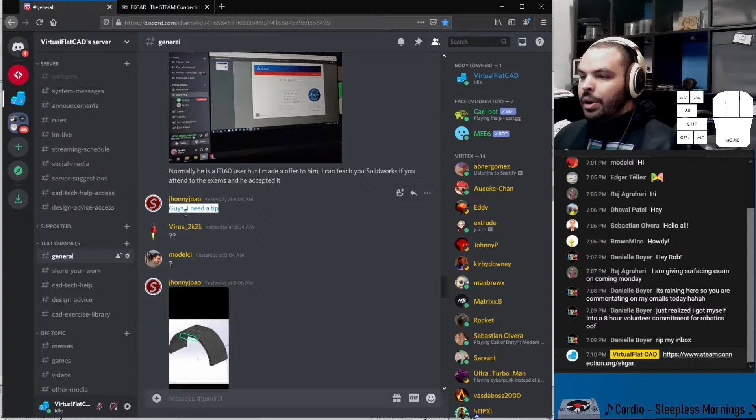But then we got Johnny Joao that comes into the mix here, and this is what our CAD model of the day is going to be about. It says, I need a tip. And looks like he's working on a model here where, I don't even know what this is called. I want to say it's a wheel well, that bump on the inside of a vehicle, like a school bus will have a wheel well. I don't know if that's the right name for it.

I know this down here is a mud flap, but he's trying to model this thing up here, and here he gives a pretty good reference image. So I think we should do this today using surfacing techniques. I think that'll be kind of fun. They try a couple of things. Modelci, here to save the day, suggesting the wrap feature, which for his particular situation, I would have recommended the same thing too. Curve projection, but it didn't accept cutting.

I might model this from scratch. Looks like you got pretty far, man. Yeah, not bad at all. And then he gets, I believe this is in Portuguese, but I bet that translates to rebuild errors. And then here's the thing for today. I'm probably gonna work off of this image here. So let's get this saved out, shall we?

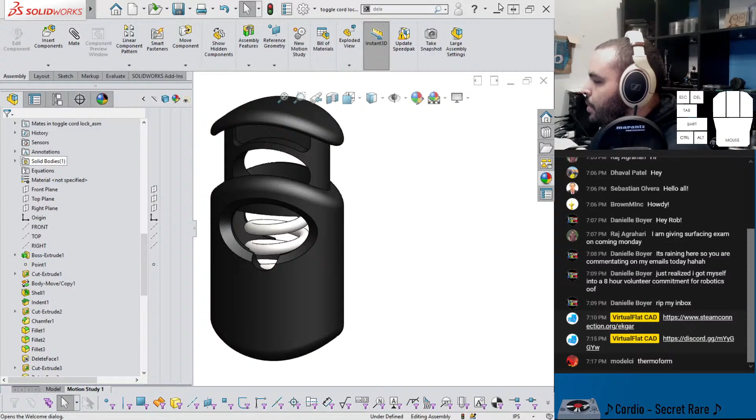So let me get this into Solidworks. Oh, this was yesterday's thing. Still had it open. Didn't restart my computer. Okay, let's get a part. And I'll just paste this in here. And let's get the markup. Let's draw our game plan here.

So what I would expect this to look like, it's kind of this semicircular shape. Like this, right? So it would start with something like this, then model these cutouts. And I might do that by modeling a surface, so that would look like this, sort of. And then maybe use a thickened cut, or something similar to that. That's something we can try, though I see there's like a draft angle there. And then cut this ring, I'll try and shade it in. I really should get a drawing tablet.

So I would sketch that, and then thicken cut into the solid. And the nice thing about that, since it's all solid, I don't really have to worry about trimming surfaces to make them perfect. And then I would rinse and repeat for that. So it's really three main features here. And then there's kind of this lip here. Maybe we can accomplish that with a sweep.

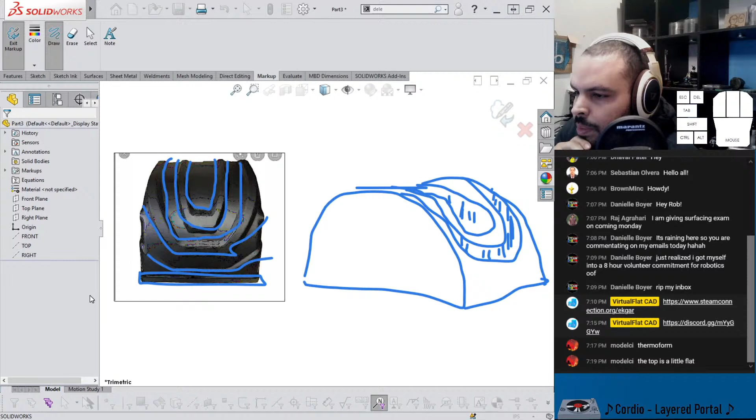Modelci's saying the top is a little flat. Yeah, it's kind of tough to tell. Let me look at the other pictures he posted. And I'm sure you could modify this exact shape into what you want. I assume if the top is flat, instead of being perfectly semicircular, it might go like that and then cut like this maybe. But let's take a look at this. Go back into general.

Man, this is the lowest res picture on the internet. Well, not really. I used the internet throughout like 2006 and even before that, where GeoCities was a thing. So I've seen worse pictures than this, but this picture's a little crunchy. It's a little hard to tell what's going on.

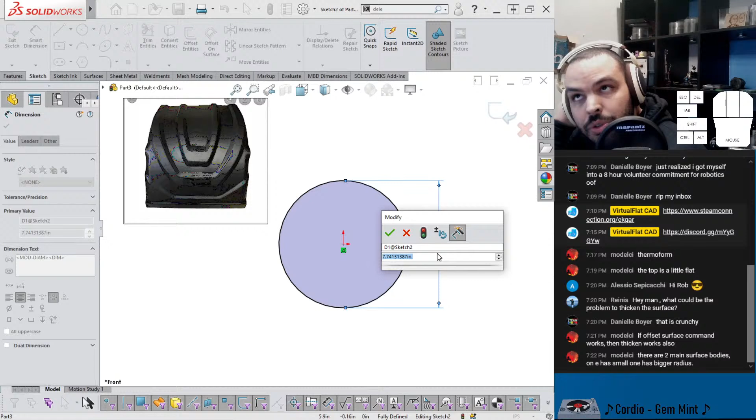And there's many ways to go about this. I'm just gonna show you a way. You may build these two and continue. Yeah, that's right. And then you can probably connect those with a ruled surface or something like that. Depends. Or loft surface or boundary surface. I'm gonna say 42. We'll start with that. That might be too big.

But with that, I'm probably gonna make it like a perfect semicircle. And yeah, we'll just work from there. And I'll resize that picture in a second here. Let's see. Let's go like that, and then let's resize this boy. You know, this is really the best bit of information we have on it.

So to accommodate like a truck tire, maybe this will be like 26 because it's a radius. Around where I drew it, I think is fine. I'll just start with an extrude mid-plane, and to nail the aspect ratio, let's maybe get 24 and turn it to the side. See what that looks like. There. So maybe a bit more, something like that. And then this curving characteristic, we might take care of that with a fillet. We'll see.

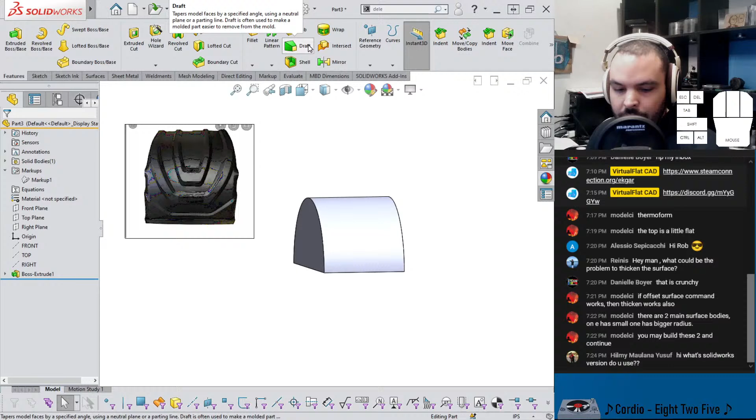Let's see if we can get these fillets in here. These are gonna have to be pretty big, aren't they?

What graphics card do you use? I am actually running an NVIDIA GeForce. It's a gaming card. Yeah, if you're an independent SolidWorks modeler, or you're a student or something like that, I don't think it's critically important that you need a workstation card. Those are very expensive. But actually, Modelci in the chat is very knowledgeable with setting up a computer with SolidWorks. So maybe if you ask him very nicely, he can help you if you're looking to set up a computer. He's active on the Discord.

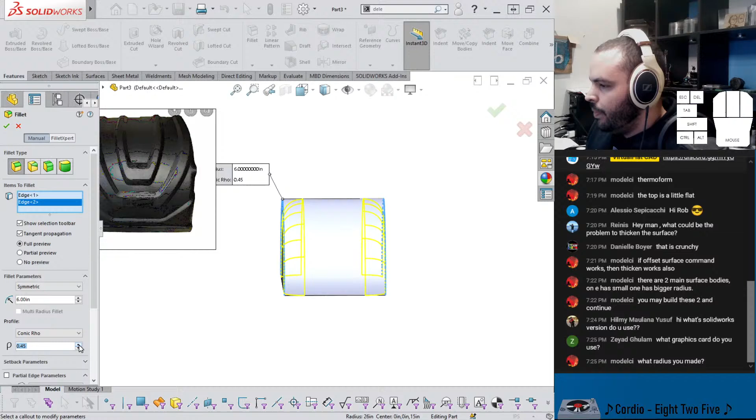What radius did you make? Overall, 26 inches, but I'm trying to see if we can maybe use a unique kind of profile. No, it's too sharp. Maybe use a conic fillet. Something like that. Another mark against this picture is that it's taken with a real camera, so we have to deal with perspective foreshortening. So what I'm going to end up with here is not going to be one for one this exact model. I'm just trying to show you some overall techniques.

But it's 650 millimeters in metric. Modelci coming through for the people in the rest of the civilized world. Yeah, I have to apologize. I am based in the United States of America, so I'm very familiar with the imperial system. Though I do use metric. It's not that I don't like metric. It's just, I grew up with it, so it's just more intuitive for me.

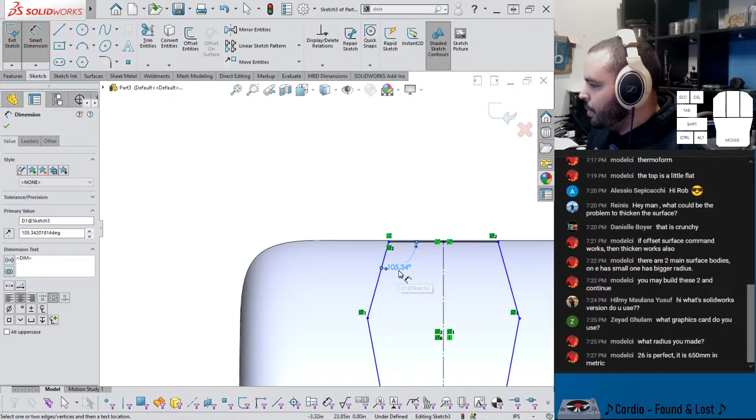Oh man, I don't really know what's going on there. I'll probably put this angle very slight. Shoot. Well, I defined it like a doofus, but just coming a little bit out, because I do perceive it to be doing that. Okay, maybe do that. Kind of defining this shape. So we'll see what we get with just some lines here, because it is fun to break out the spline sketching, but it can also be kind of a pain to work with, and you might get a good result without it. So that's just going to be a little bit less than what's up on top, so I put 6 there.

And then this, maybe let's say 7. And that seems kind of proportionate. So just taking advantage, just drawing the profile that I can perceive as seen from the side here.

Okay, so how do you get this onto this surface? And for this, there are many ways to do that. There is, of course, your project curve. You can project your curve on a surface here. You can use your split line, which I think is a pretty cool thing to do to a surface, because then you can feed it to other surfacing tools. Splitting up faces can give you more control, and that's what I'm thinking of right now.

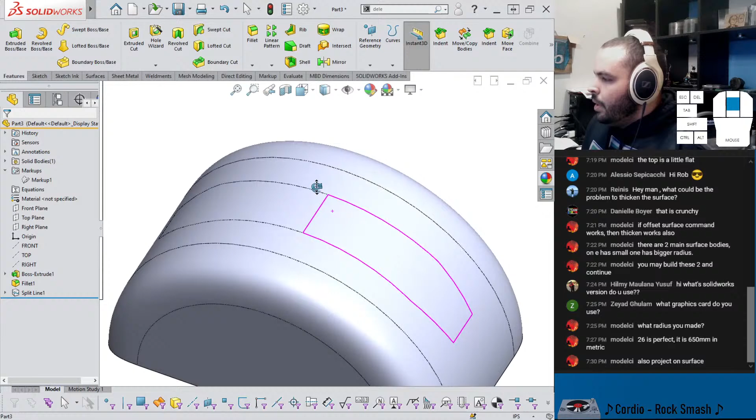You can extrude this as a surface and trim some more surfaces. So yeah, let's try this. If I say split line, this on this surface, will it be angry? Okay, so let me turn, it's not being very helpful, so there we go. So we have this thing that looks like this. And I wonder if I overbuild this, would this line go away? Although it's not a particularly big deal.

Yeah, project on surface, another great command. But what I like about split is that I can go to surfaces, and if you go to offset surface, I can pick these two to offset. So how deep do you suppose that is? I don't know. So I'm gonna guess that's like an inch or like 25 millimeters. Just a guess, because I don't have the physical specimen in front of me. I can't measure it.

So there's 25 millimeters, but towards the inside. And we don't see it because the surface is on the inside. Then what we can do, I want to see if I take this surface and I do a thickened cut. I don't think there's really any draft settings we can put on this. So yeah, we just get this straight cut, similar to what wrap will produce.

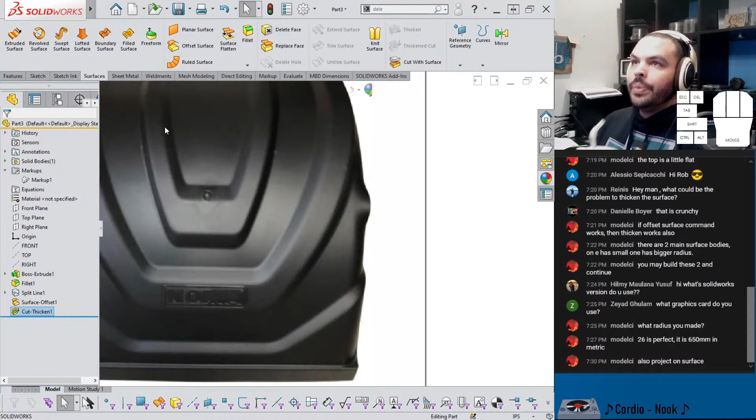But you see with this, there's definitely a draft angle, and a feature like that is there so you can actually take it out of the actual mold. If you don't have the draft angle, it gets stuck in the tooling. It's just generally a pain. So I'd really like to get some draft here.

I don't know if our draft tool will work all that well. If you know, there's a draft tool here. Because neutral plane, yeah, because I need it to be draft with respect to this surface. So what I'm thinking here, what would be cool? Let's try this. Let me delete that. So I'll leave that as is. So let's take a look at this.

If I go to my surfaces and maybe say ruled surface, and let's do, yeah, we can do a sweep. Use draft with parting line option. I think I would have to create a parting line, but I'm not opposed to that. Alright, let me try modelci's suggestion here. Yeah, I probably should have suppressed it rather than deleted it.

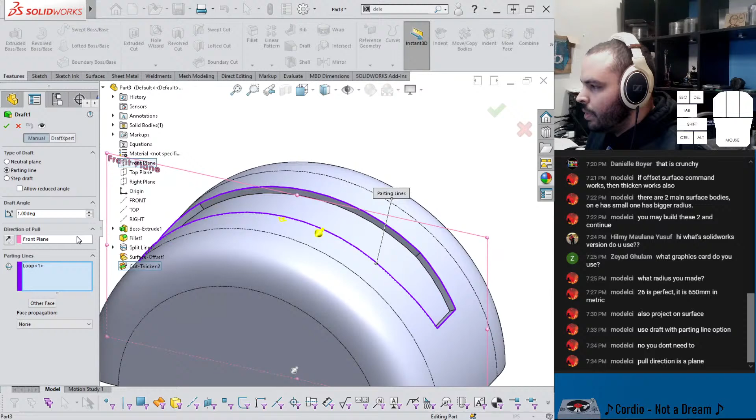Here, let me try my other thing here. I think this could be interesting. So I do this and say select open loop. Oh, I forgot they're purple. So we get something like that. Swept cut for the draft. I think that could also work too.

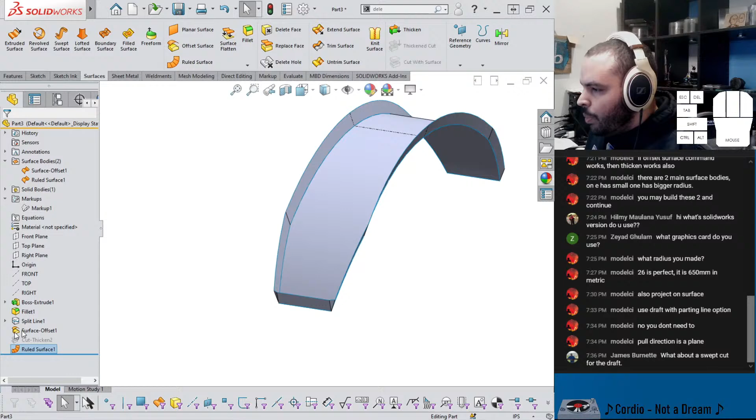I don't know how much draft I want, to be honest with you. I'll just leave it at 20. And I'll overbuild this. I don't know if there's any bumpiness to this. Oh no, this is to be expected because remember, it was created with, if you look at my split line sketch, yep, that lines perfectly up there. It's tangent here, so we have this. And I might need to overbuild it further still.

Oh, but I need this to go down instead of up. Maybe ruled surface is not the solution here. I have another idea if this doesn't work. So normal to surface doesn't really give me the options that I need. Maybe this isn't it. And then tangent to surface doesn't do anything. Okay, so let me try something else.

So let's suppress. And let's do this. If I offset these again, offset, like that, and going up this time. So we have something like this. I can say, let's do extend surface.

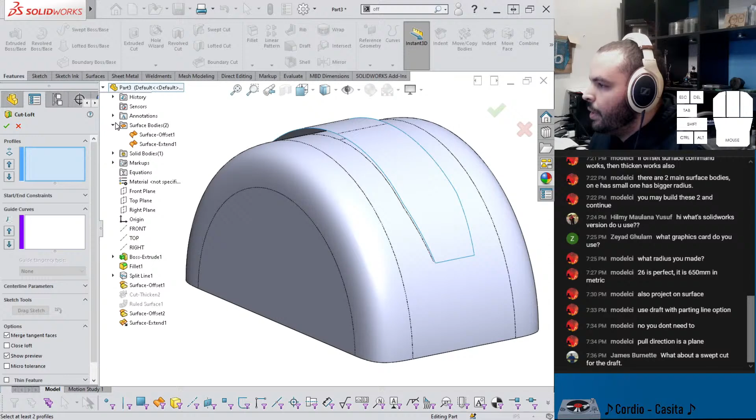Let's try a lofted cut. So I believe you can put, what's it called? Surface bodies in here. Let's try. So one to the other. And just gotta line up the green. You do get an output.

Not bad. I might want to exaggerate the effect though. So put this all the way out to 1. How does this look? Yeah, more still. It's a way. So it keeps that angle consistent throughout this cylindrical surface.

What is this? I don't know what the thing is called, Kuronite, but I'll show you the picture. I'm trying to help someone out on the Discord here. Go here. This gentleman here is doing this truck tire wheel well thing, and we're just kind of playing around with different suggestions, you know, coming from the chat among other things.

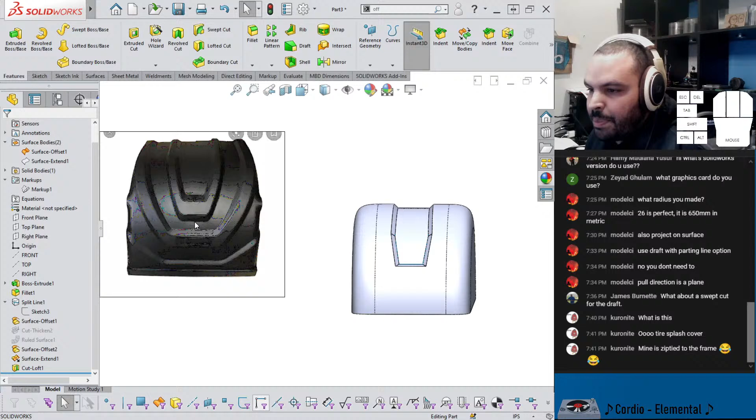Mine is zip tied to the frame. I'll make sure to punch some holes to zip tie this. So let's go back to Discord again and take a look at what he's doing. So one thing I do notice here, and what I would recommend to Johnny Joao here, so you see how he has this feature here, and I think that's some kind of locating feature. It's very blurry in this image.

It broke on the highway and it's mostly melted away. I'll tell you a crazy story while I look at this. I drive a pickup truck, and I used to have a truck bed cover that folded in 3 pieces, a Tonneau cover, and a clip broke while I was driving down the highway, back when I lived in Cleveland, and that thing just flew away like a piece of paper. It was not light. It probably weighed like 60 pounds. The clip broke. I found pieces of the broken clip after I pulled over, and this thing just flew away out of my truck bed like a piece of paper.

Luckily, well, I guess not luckily, it was late at night, so it was dark, so that was kind of scary, but that meant it was not heavy traffic. So the only other person on the road behind me was a big rig in a different lane, and he flashed his headlights at me saying, "Hey, you lost something, sir." And I'm like, "I know, I can't see it." But yeah, scary stuff. Make sure your stuff is secure. Don't be like me. Yeah, nobody hurt. If it was rush hour, that would have been different. It would have definitely hit some other car. But it flew and then just kind of rested on the road.

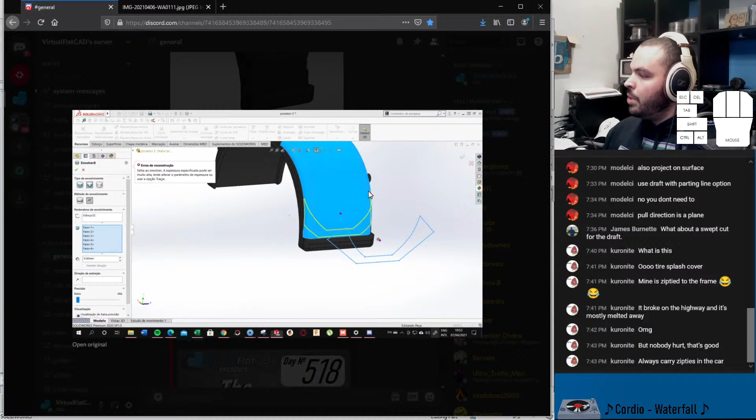But what I was saying here is I would probably leave these features until all the surfacing work is done. That's just kind of my general opinion on that. Because with surfacing, you just want to give it nice big, for lack of a better term, surfaces to work with. If it's trying to wrap along the surface like it's trying to do, it kind of struggles with that if maybe there's this thing in the way, like if this was over here. But it's just a rule of thumb.

Kuronite saying, always carry zip ties in the car. Yeah, totally agree with that sentiment.

But let's get on the right plane again and sketch something similar to this. I might bring back this old sketch and base it off of that. Whoops. Can this move here?

So if I get, you know, select chain - correct term is tire splash cover. That's helpful because I always try to use the proper name of things whenever I make my posts. I think it's not only a good opportunity for me to get educated, but I think it's cool that other people get educated as well. And I think that was definitely the case yesterday, with yesterday's CAD model.

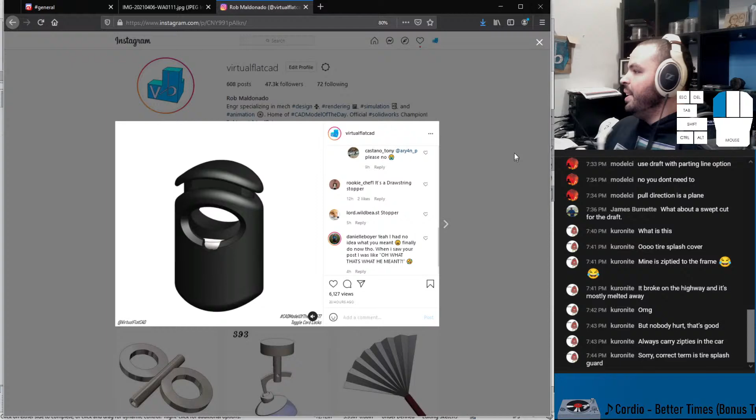But yeah, this thing doing well too. My brain hurts. Oh boy, that's the story of my life. My brain is one big hurt. Yeah, toggle cord lock. My brain is one big hurt.

Danielle, yeah, I was so confused. I tried to no avail for like 30 straight seconds to explain to Danielle what I was trying to model, and I just gave up, and I'm like, you'll see. You'll see. I'm not crazy. I mean, I am, but yeah.

All right, so we'll start with this. If I get rid of this offset entities relation, I should be able to yank this really hard, and it'll come out. So I can give this another dimension, because I do see that.

Well, I should be focusing on this. Yeah, I might have made the initial thing too long, now that I think of it. Because you gotta keep in mind that I'm not really measuring this. I'd be interested to see if I go into this sketch and then maybe turn 6 into 5, and then 7 into 6. Rebuild, everything's fine. We're in happy land. Good stuff.

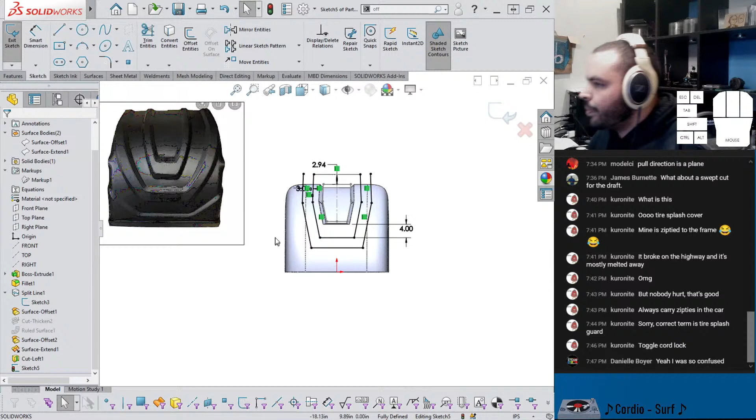Excuse me, guys. Yeah, I'm trying not to die right in the middle of stream. So, I mean, now that's sus. You know, that's Among Us.

All right, so I want this to bow out a little bit more. To accomplish that, I might turn this into construction, and just kind of sketch these manually here, like that. Additionally, I can drop a center line like this, grab these two and get them mirrored to the other side, and remember to turn these into construction, and then we'll eventually put this back up.

Rip Rob, yep, that's me. Just trying to do my best to survive and just make my models of the day, and models in general. Otherwise...

All right, so we got something like that. Yeah, the thing is, this is not very conducive to wrap at all. Yeah, because it'll try and put it on those surfaces.

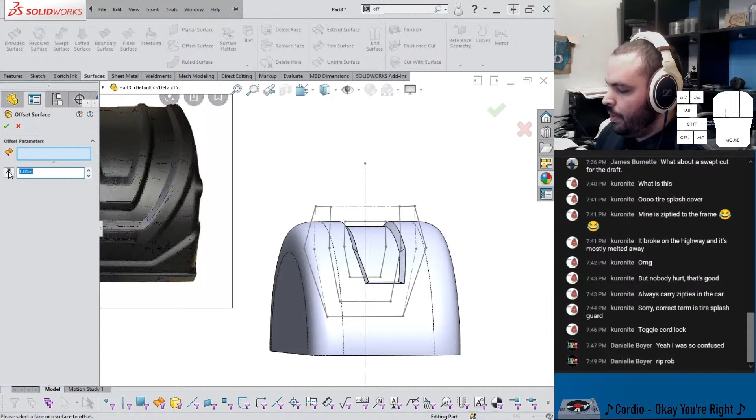Let's try another thing. So, if you go to your surfaces, say offset, turn to 0, you get copy surface. Let's copy these. So if you pick the 3 things that are next to each other, they end up attached to each other. And let's try and grab this and trim to get this out of here.

Yeah, this is gonna be pretty interesting. I wonder if you could do that same thing that I did for the other, but without overbuilding that surface that was way up here. Because this surface is right on the model.

Or maybe I can try that other suggestion. James said, what about a swept cut for the draft? That's something we can try.

So what you would do is take that surface and thicken, cut down to that depth of 1 inch, like that. Remember, because I have this as a solid, I don't have to worry about cutting all the way through. I can just make the depth whatever I need it to. I just focus on the shape, and Solidworks just helps me.

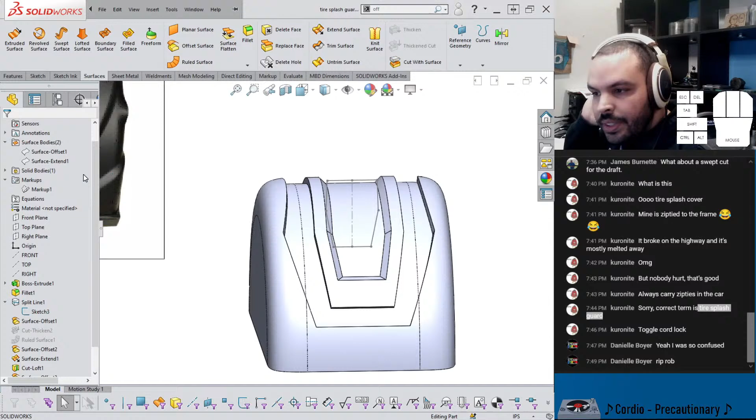Tire splash guard, give me that. Jeez Louise. That's embarrassing, I should have better, more consistent saving habits. So will only lead to ruin.

Alright, so something I want to try here. How do I want to do this? I don't want to do a solid sweep, and the reason is because especially over here we have a conical surface. Trying to get a small triangle to sweep along this perfectly and not leave any air pockets on the inside is going to be very difficult. So I'd rather sweep just a surface and then maybe do something like a replace face.

Is something I could try. Alright, so let me try the right plane, grabbing a line. And the nice thing about, oops, I snapped to something and I don't know what it was.

The nice thing about doing it this way, though, is that you can actually specify the angle. I don't know if you noticed, but with the other technique I didn't actually type in any angle, I just oversized one of the surfaces until it just looked right. So with this technique, I can actually type in a value like this.

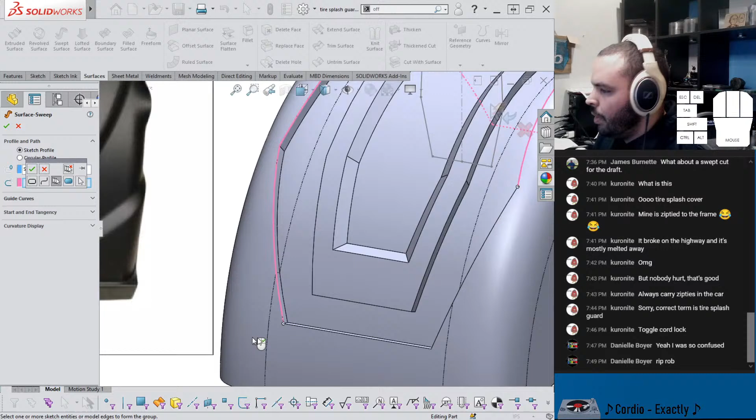So it is letting me select it, though it is kind of being a pain. Alright, well, it's only a small handful of faces, or edges, excuse me. Not the worst.

That's not good. Cannot get... oh, I guess I really... yeah, here, I'll stop being like that. I wonder if I can say select loop. Wrong loop. Wrong loop again. Oh, poo, I'm going to have to do this the hard way again and just do a convert.

Or do I? Oh yeah, because I guess I used up that original surface. Here. Why work harder? Let me just go back to before the dawn of time.

I guess we can do that. Yeah, so back when the surface existed, just rolling back, I can specify a 3D sketch. And now with these blue edges, those are open edges. I can right click and say select open loop. There we go, ah, thank goodness. Thank goodness for selection tools.

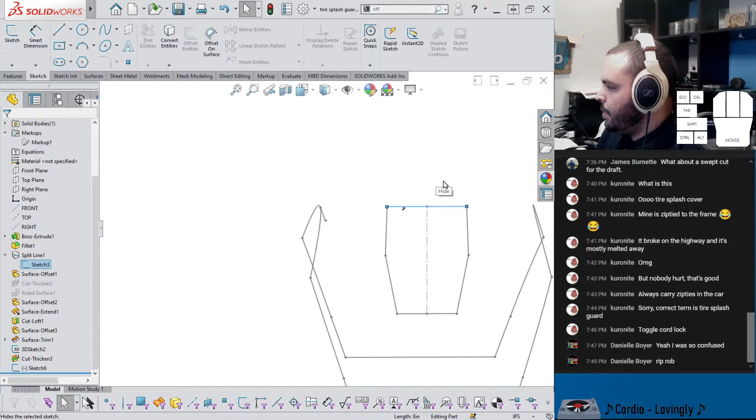And just to have better form, I'm going to take this pierce out and make sure it's pierced to this path specifically. And let me hide this. This is just extraneous. This is kind of the situation what we have right now. Let's go for the surface sweep.

This along... can I select the whole thing? Okay, so it looks like that is giving it to me. Yeah, so it is going inwards, just like... Yeah, so I think at least getting the first draft face in there, this is definitely very helpful. Alright, so we have that.

Hello? This thing is not showing up. Oh, okay, I just had to... The question remains, like, I know I haven't done this one yet, and I'll do that in a sec, but I just have this as a surface. Like, if I hide this away, there's like a flat face hiding underneath there. This face is the imposter here.

Oh man, I know Among Us memes are so stale at this point, but I can't help from ironically saying them.

You know what this is a call for? Let's try intersect. So if I say intersect, yeah, you could thicken and combine. But what I like about intersect, you select that and the body, say create internal regions, intersect. And there's that triangle cross-section body in there that it's creating.

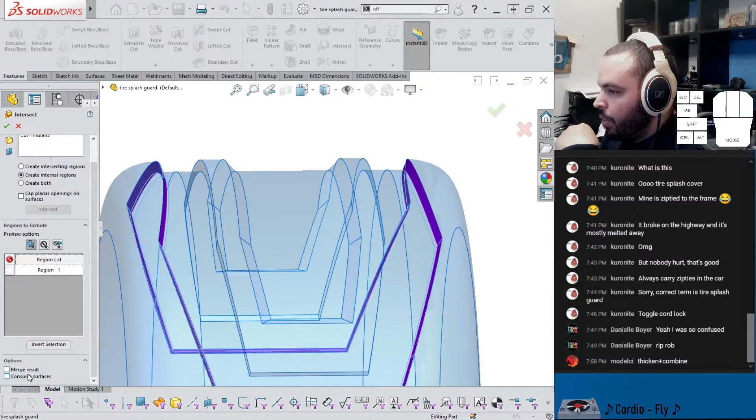Should be even be able to say consume surfaces and merge result. You didn't consume the surface, so that was a lie. But yeah, that seemed to have worked. So that's one way you could do it.

I want to test out modelci's way of doing it as well. He's just saying take that surface and just feed it to your thicken command. I just love the simplicity of that. I guess you just gotta make sure that it's not so thick that it comes out of any other side. But in this case, it's doing pretty well. That does it as well.

Yeah, I think it's situational, right? Because the intersect command only works if you completely enclose something. So if you have like a hole open somewhere, you need to address that. Thicken doesn't have that limitation, but with thicken, you gotta make sure that you're not coming out of any other side, going too far in some regions. But this thing's pretty thick, so there's no problems there.

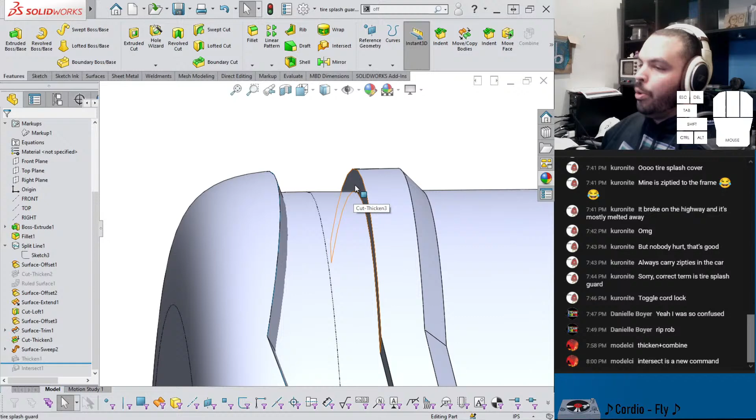Intersect's a new command. Yeah, it's pretty fun, and even what it can do, let me roll above it, because what I really should do is the intersect can actually form both of those solids. I just have to do another surface sweep.

You and I are learning together. That's what I really love about live streaming. And I think it just fits with my teaching style just super well. It's just like, whenever someone says, why can't you do that? And I'm like, oh, why can't you? Let's just try it out.

It's cool, so we got that. Oh shoot, I need to go back here. I'm gonna hit Control T on my keyboard for flat tree view, so I know where to come back to. Because I need another 3D sketch with this open loop. Select open loop into convert. That gives us our path.

And then we can go back here. And Saif's in the chat. Hello, how's it going? Glad you can make it here. Make yourself some popcorn, get your favorite snack, and we're hanging out.

I did the same thing. I should have waited before putting the pierce on there. And I don't know if I put an overall length to the other thing too. I should probably make that longer, 1.5. Never hurts to overbuild surfaces. But we'll construct with another swept surface.

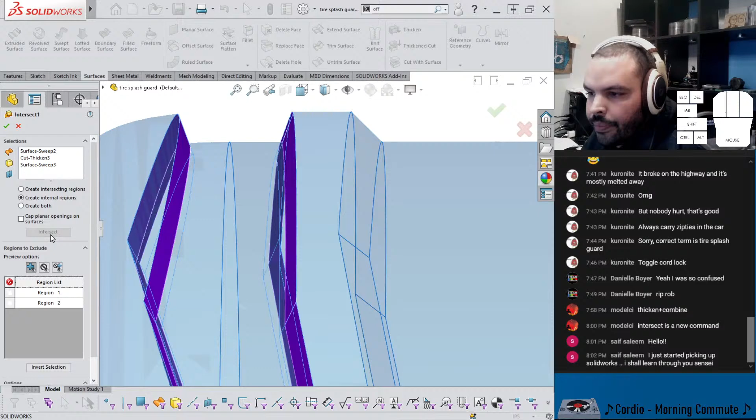Saif was saying, I just started picking up Solidworks. I shall learn through you, Sensei. Well, I think you're in the right place. I don't think I'm the best Sensei ever, but I do try my best. What is very consistent is that both I and people in the chat tend to learn something every time I do one of these streams.

Okay. Hide. Oh, that didn't work. Big oof. I didn't exclude any bodies, did I? Yeah, that's totally not working.

Maybe I have to use modelci's way. Let's do that, and can't go wrong with a thicken. Make sure it's going the right way, so it's going towards the inside. And just to make sure, give a sanity check. Let's grab a section through this. Yep, and we have no strange gaps or anything like that, or any weird protrusions.

So far so good. Saif's saying we learn together then. I love it. Love the attitude. So good. Yeah, I think attitude is just like a huge, it's just a huge component of being able to pick up anything. Like you're excited to learn and just have fun with it as you go along. You learn a lot better.

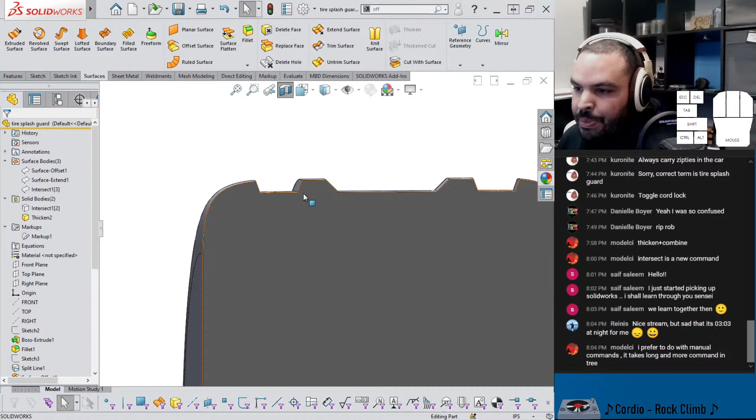That's the important bit. Modelci is saying, I prefer to do manual commands. It takes long and more commands in the tree. Yeah, and I think that's the thing. You got to use what works. The intersect command is kind of flashy, and if it worked like I expected it to work, I would have just used that, but it didn't work the way I expected. So you gotta use what works.

What is this other solid body? Oh, what the fuck? So it did make that body, you liar. You weaselly little liar. Look at this body. It was here the whole time. It just didn't merge it together. What kind of fibbery is this? SolidWorks is lying to me. I definitely said merge result. I'm guessing that's just a bug.

Then here, just to clean the stuff up, I'm gonna exclude that intersect and just leave that as is. Now we just have one body. So that's why it's a good idea that every once in a while, you go through your tree and check: is it as you expect? We should be working with one body. Why are there two? That'll help you prevent a lot of those design errors that come down the line.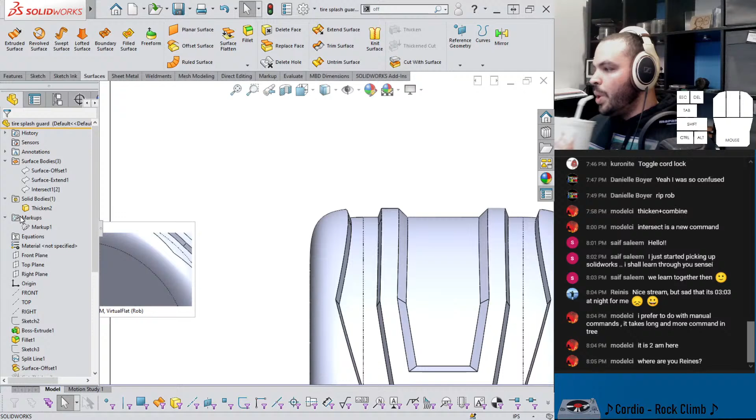How are we on time? So far so good. It's just been over an hour. Hello? Yeah, I feel like making that steeper. So here, let me do something first. Let me edit, double click, say that this is equal to this 20. So they're linked together now.

Someone's saying, I need to make an interesting project for a company. A SUP board from 2 parts, up and down, and just assembled together by glue, but I can't thicken 2 surfaces. I'd like to ask for your advice, but it's so late, and that would take time. Well, you should get in touch with me. You can DM me on Discord. Maybe if you're okay with me showing that example on stream, I can show my troubleshooting process, and maybe we can help you out. But like you said, it would take time. It could be any number of things, so I can't say check this one thing and change this other thing. You just kind of need to know what you're dealing with.

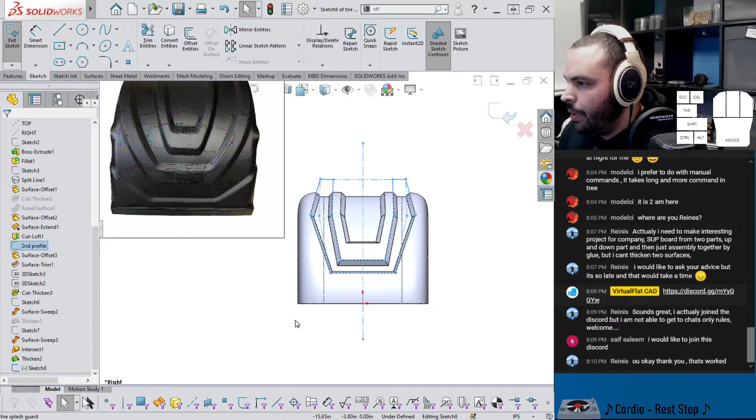I think I like that. Yeah, I think this is one where wrap is more readily applicable, but of course we need yet another sketch, so we'll get to work on this. I should really be labeling these. Okay, this one, I'll call it second profile. And this one first, or wrap profile.

English is a weird language.

Alright. We got first profile. We got second profile, so I'll show that. Because this is looking pretty consistent, like this thing here. So let's grab these three, say offset. And I see there's a bit of a curve. I might be able to do this here. Okay, well, it accepted. That's what I wanted, I promise. I'm just gonna turn that to construction, and I might put my first arcs in there.

Oh, let me just define one and just mirror it over. What am I doing? Such a madman. And that's good, so we'll leave that there for later. Let's do horizontal to that, but coincident to this. So that'll leave this point hanging on the outside. But that's what I want because I want to overbuild it, make sure it can actually wrap the full way. Give this a radius, perhaps. Get this mirrored.

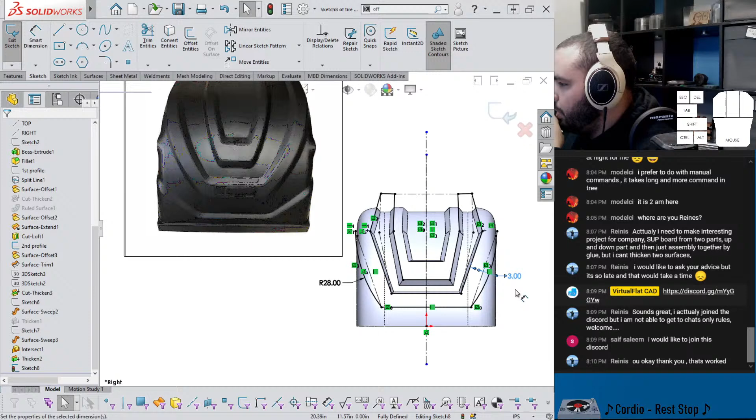And what now? I think I'm kind of running out of space here. If I put this down to 2.5. Oh. Well, shoot. That doesn't work anymore. We're gonna have to put this somewhere else. Maybe I keep the horizontal, but then I say that this is some distance from here, because I really do want to overbuild it. Alright, so that propagated to the other side. This curve does not look like an offset of this one. This, however, I can offset, so I'll do that.

Alrighty. Let's take that, offset just the one. 2.5. And I wonder if I can define it by saying that this and this have equal radii and equal curve length. So all that should be left is an angle, so that's good. Let's grab one of these, turn that into a construction. And then I could just say that this and the center line has some angle. Arbitrary, 55 or something like that. I guess I should wait before mirroring. I could have done this in the one operation, but that's fine.

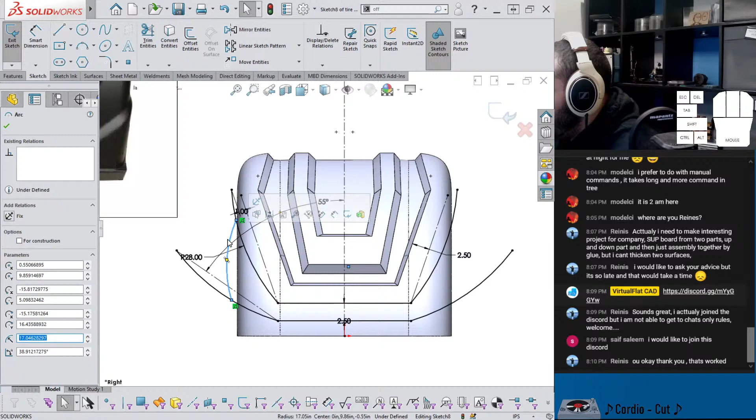So the real question is, oh man, this is turning a little bit into a mess, so let me hide the second profile. Okay. And let me hide also the sketch relations. They're starting to become a little overwhelming. So we have these three line segments and then these three line segments. How do we want to connect them up together is the question. If we wrap them, it'll try and preserve the length, which means we would have to make the end look kind of good, actually. I wonder if I'm gonna have to put another arc, maybe like this. Oh man, sketch is starting to get a little hairy, but we'll be fine.

So let's say that this point and this point are vertical from each other, because it will wrap on a flat surface eventually, so it'll just look like an arc. It has the radius already, so I think it's just one: what is the distance between this and this? I'm kind of afraid of the trimming situation with this. It's going to be very interesting. Let's just test this. If I trim and keep as construction geometry, which is a new feature in 2020. Do that. I blew up my relations. Boo.

That's sad. So you really don't want to start slapping on more dimensions. What I might even do, this might be a little cheesy, I can just bring this over onto the other side. But we can't use this sketch for wrap because it's got the non-consistent endpoints.

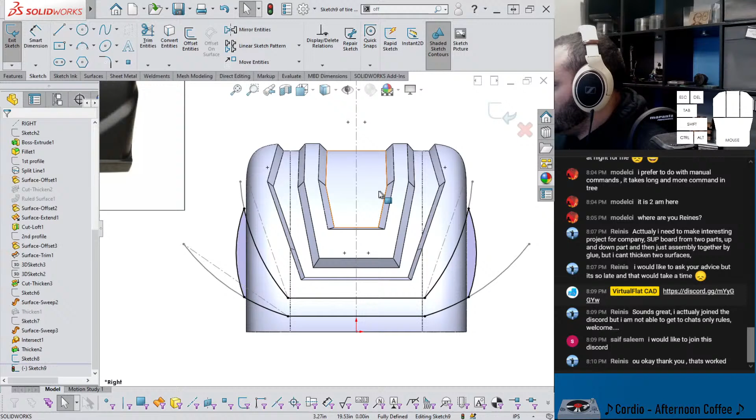And then now, let's hide this. I'll call this third profile construction, and then I'll call this the third profile. Okay. So, wrap. Let's wrap for it. We grab this. We want to wrap on, oh shoot, I forgot, this is a conical fillet. So we need to specify spline surface.

The pull direction will be in the direction of the right plane. Yep, that is a pull direction. I don't see a preview, which is very sad, and that might be what Reinis was facing. Will it scribe at least? Could not use any contours from sketch. Do I have to put all of these in here? I mean, it's complaining about the sketch itself.

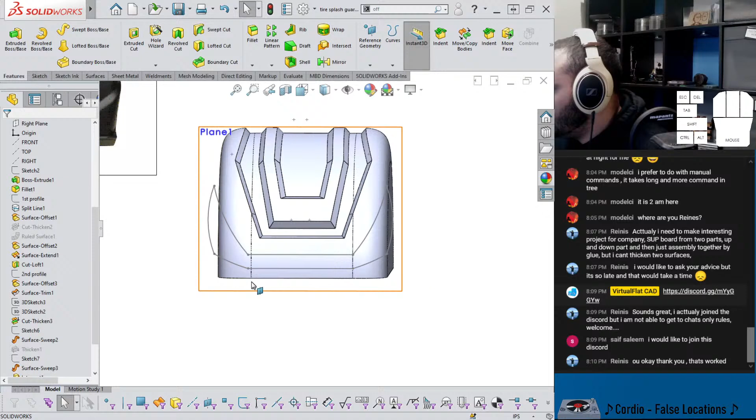So just out of curiosity, if I go above that in the tree, grab the right plane and just copy a new one, just out here. And then grab the third profile and say be on this new plane. So now it's coming out here and then wrapping on. I don't really see anything wrong with the sketch. It shades just fine. Let's see what this does.

We need spline surface on that. Pull direction. I'm still not seeing any preview. That's not good at all. It's just weird to see something completely fail like this. Now I'm starting to see some of his pain here. Let me just make sure that this doesn't change anything. Won't it work without a preview? No, it just gives me can't use any contours from sketch. And we just run repair sketch on this.

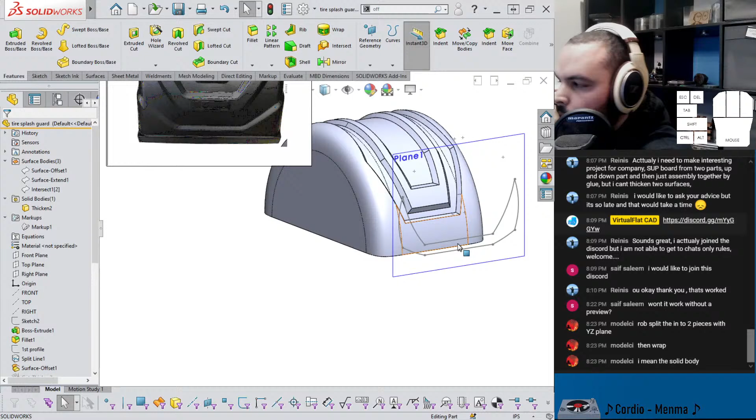Here's another idea. Maybe the fact that this surface is split is just giving it... split the... Are you talking about like split the sketch? I'm not sure what you're suggesting there. Are you talking about just using half the profile? Here, let's try this. Split, so I can use surface, cut with surface. Split it in half like that, so it's not getting confused. No worries, dude. So let me know if it could be that.

Let's see what my brain is doing. All right. Wrap. Hello? Oh. This sketch, please. And this. Oh, hang on. I got excited for a second. Oh, let me try Scribe. Because Scribe is like the best case for spline surface wrap. If Scribe doesn't work, nothing else is gonna work, because that's like step one, basically. Alright. So let me put that back.

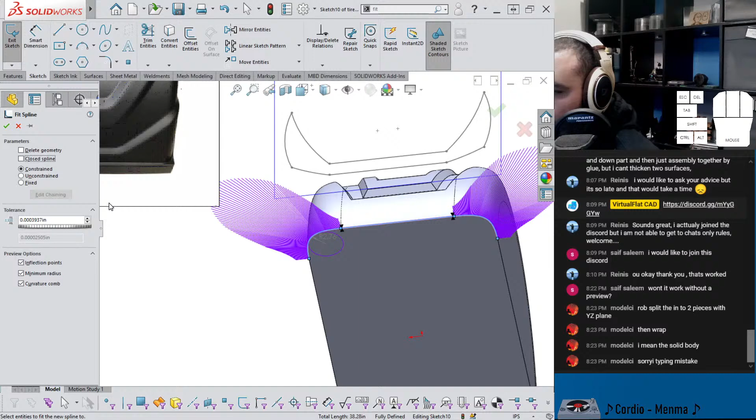Something I do want to try. If I sketch on here, grab this, convert, like that. Then go to fit spline. Fit these 3 splines like this, so it'll fit one spline to go through all of that. So we got that, and if I go to surfaces, get a revolved surface, and the axis of revolution will be the one coming out of the front plane. Let me get only 90 degrees of this, the other way. So now we have a pristine surface that describes that overall surface, but it's all one piece.

Oh yeah, in the Discord we got a message from Yaya. Can't join the live stream right now, but at least I can show you guys my latest animation, taken from an ultra-wide lens. Yeah, let's take a break, guys. Or let's see what this does first. I'm sure many of you are hanging on the edge of your seat. So let me try this, and then we'll go see what Yaya's talking about. Let me move the camera here. Whoops, almost bashed my phone.

And let's try wrap one more time. So this spline surface, it should be just on this. So that works. Look at that. So what does this buy us, right? I wonder how that actually looks on the rest of the body. So let me do a delete face to this. Oh, because I put delete and patch. I just want delete, just leaving that body. That looks pretty good.

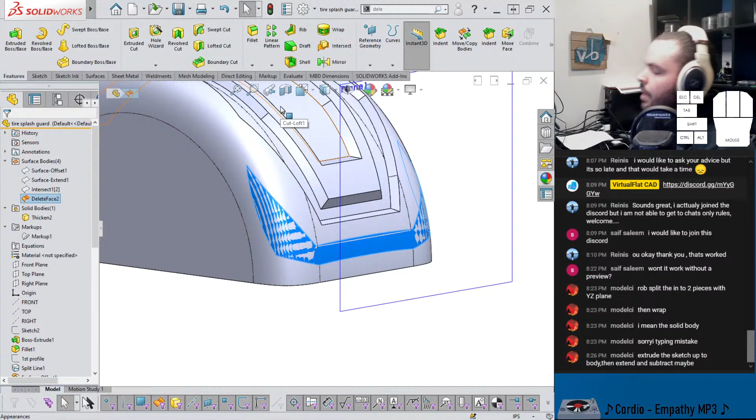So now that we have this, I can take that surface, and I wonder how well it offsets. So here, I'll show you a cool trick you can do. If things fail the offset surface, it's usually because you have what's called a degenerate surface. Because whenever you have a surface just like this one, where it's not a mathematically simple surface like a cylinder or a plane, that's called a NURB surface. And NURB surfaces like to be four-sided. If you can see the underlying curves, they would look like a grid.

So to see what that underlying grid looks like, you can search for face curves and pick this, and then just turn this up. What I see here is a very good situation. You can see that the curves are all four-sided. You don't see all the pink ones converging on a point, because whenever you see all curves of one color converging on a point, that's a degenerate surface. And that's where a lot of the failures to offset come from.

So what does that mean? Let's get out of the nerd speak. That means I could use either one of these techniques because they're based on offset surface. What I mean to say is that this is a very well behaved surface, and I'm feeling pretty good about it. Translation.

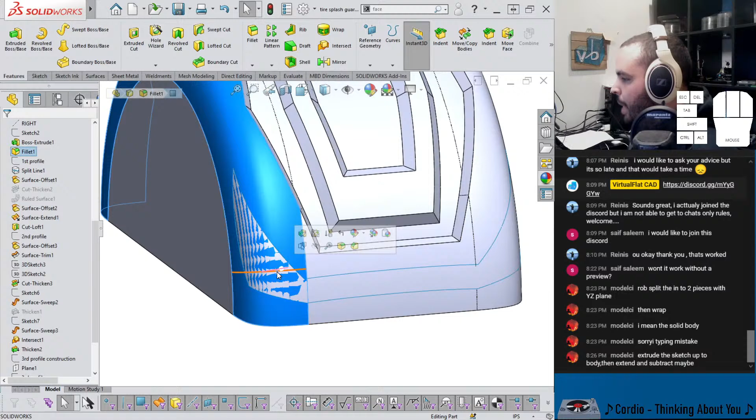But let's go back to this. I'm thinking because of these sharp corners, the sweep method might be a little bit suspect. So I might do it with the lofted cut method here. What I could even do is just hide that away, and remember, hover over a body, hit the tab key to hide. So if you see bodies disappearing, that's what that means.

Not move, I'm sorry. Offset. So I should be able to go 1 inch downward, which is good because that's where we need the cut to be. And just for safety's sake, let's go 1 inch the other way as well. So this was just our construction surface. These two I'm going to use for the cut.

So to recap, I'll take that to my surfaces, say extend. I think I had to extend mine by a lot. I don't know if that's going to cause a problem. Yeah, that's going to be very interesting. Oh, no, it got it. It added some weird stuff to it, but it got it. Kind of looks like a Power Ranger helmet.

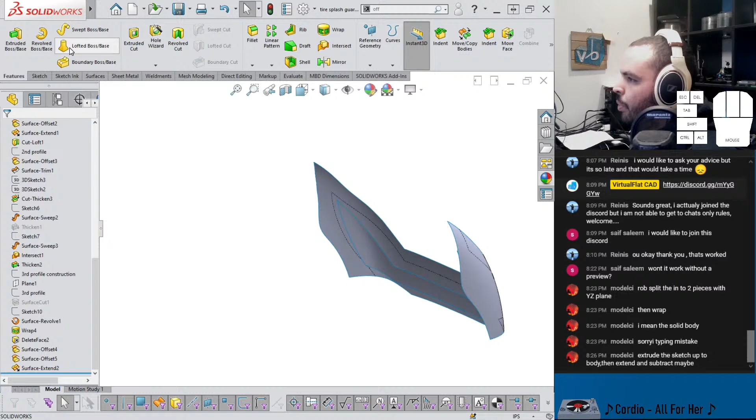Or to be cheeky, you could use a combine subtract operation. So if I just get a regular lofted boss base, remember to pick the entire surface body like that into the entire surface body, and we get no preview. That is not good. Boundary, do you have anything to say about this? Boundary trying to do something with it.

Yeah, I guess the number of edges don't match up exactly. But at least here we can control it. Let me think. Here it looks alright. Here looks a little bit strange, but you know what we can do? I don't think I've gotten this error before. Cannot create a 3D end cap face.

Quick question for people in the chat. Have you ever gotten that error before? I don't think I've ever gotten it. It's very interesting, isn't it? What do you mean? Yeah, sorry. I kind of expected this to put up a fight.

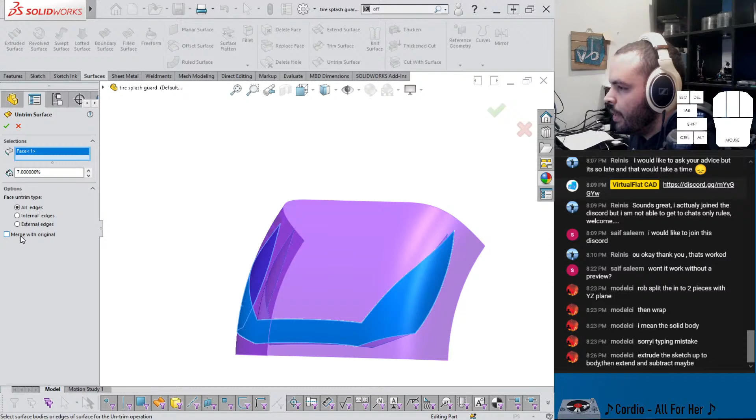Let me take a look at this extend one more time. So we do have it set to same surface. Another thing we can try, because I don't like how it made it all chunky like that: suppress that and instead do an untrim. Oh. Well, I guess I should have known. It just wants to restore the entire surface. So I guess the surface extend is the option if we wanted to do it this way.

I mean, I could build it one surface at a time, which I've done before. I just don't like how this edge looks. So that's one going into... Is that really the only defect? I could just extend this surface and trim it back, and perhaps it will play along a little bit nicer. Let's see. Oh yeah, this actually split into 3.

Just working on it. Alright, so let's get a section along the front plane. So we want kind of like an offset of this curve. Extending your surface with selecting edges. Yeah, I can try that.

Because, you know, Modelci did a fantastic observation that I actually picked the surface itself rather than... So if I, instead of doing that, if I do... Here, let me do select open loop. And hello? You guys are seeing this, right? It looks good on this side, but looks weird on this one. I mean, it still has like the same weird defect to it that I was about to trim off. Very interesting.

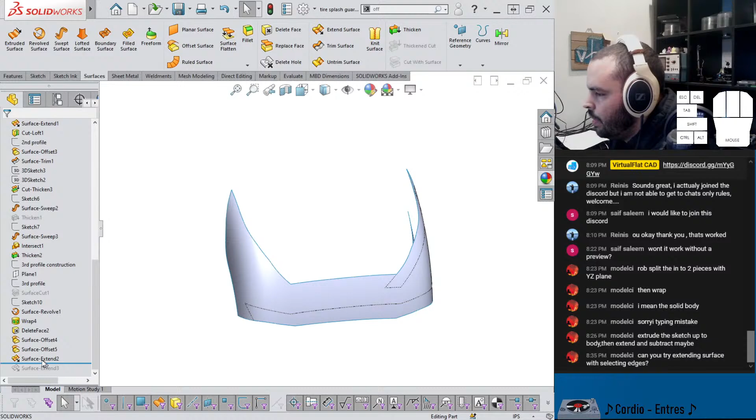I just enjoy how all my models are just like a science experiment.

So I wonder if I can actually offset this the other way. One, okay, and then oh, hello. I don't like that. I'd like to approximate it with an arc, thank you very much. Coincident. And then it needs one more point. 3 points to make a circle. Okay. Or not. Where did that point even go?

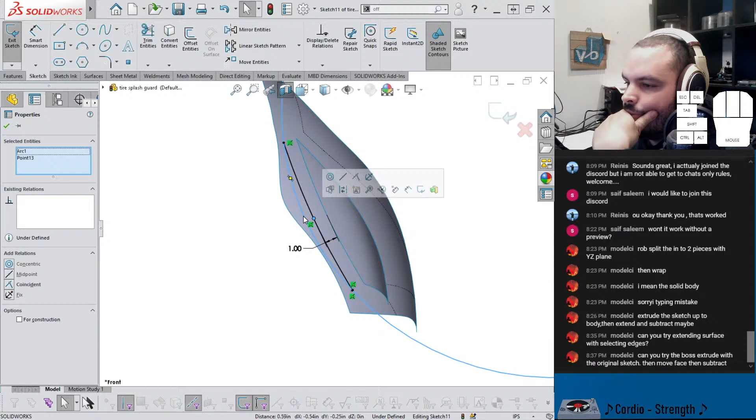Can you try the boss extrude with the original sketch, then move face, then subtract? Interesting. I'm trying to go through that in my head. Here, let me try and finish with this. I'll just give it a radius 50. Doesn't have to be exact.

Oh shoot, I should have turned. Yeah, one sec, Modelci. Let's grab that. That needs to be construction. There we go. Trim. Keep. So that looks better. You know, that's... Let's try now. Trim to this. Of course, it just mixes that up.

I came here tonight to play chess. Nobody ever mentioned anything about a sword fight.

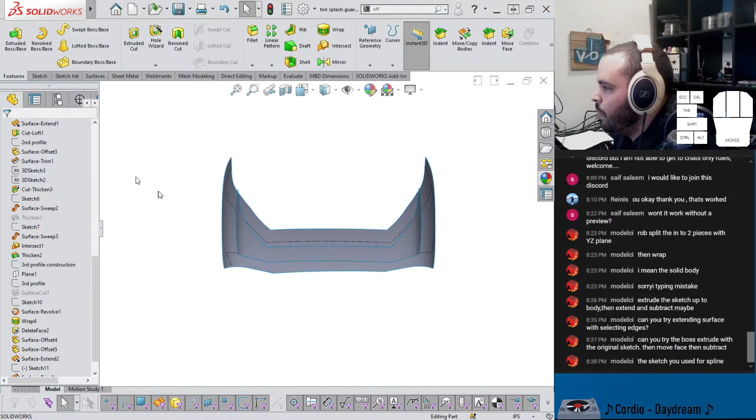What's very interesting, if that's at the middle, I could actually use this. Yeah, I'm probably just gonna call it here. Oh, we get the same error with that. So let me see what modelci is saying. The sketch you use for spline, I don't know which one that is. Oh, this one? Can you try extending surface with selected, oh no. Boss extrude. Yeah, I'm not really seeing the game plan for that. I'm sorry.

Yeah, I might just have to. It's kind of stinky, but whatever. You guys get to see some nitty-gritty surfacing. Yeah, we're just gonna stitch it together. Right click, flip connectors. Yeah, but if you boss extrude, it's just gonna have a flat face, right? I don't really see the next step after that. Flip connectors is what I'm looking for. Why is that not here? That's...

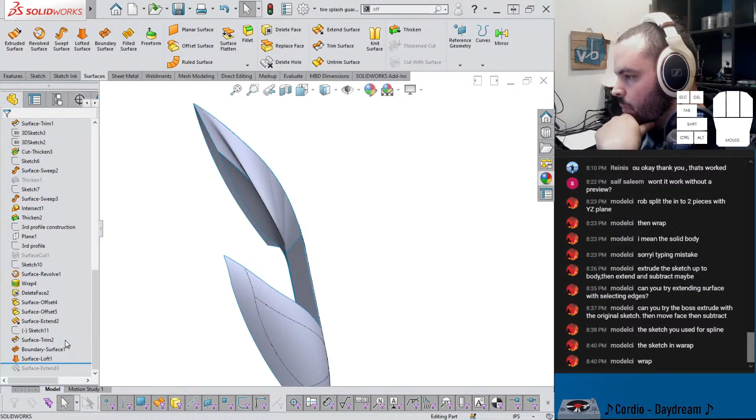Oh, that's a horrible, horrible looking surface. Let's see. Yeah, let's go back on some of this. Because the thing is, garbage in, garbage out, right? I might rescind what I said before. Maybe the play, let's go back here, is to take this surface. What if I thicken cut with that? It's gonna have to come out like this. We do get a start there, which is pretty good. And I wonder, yeah, I'm just giving it a nice thunk.

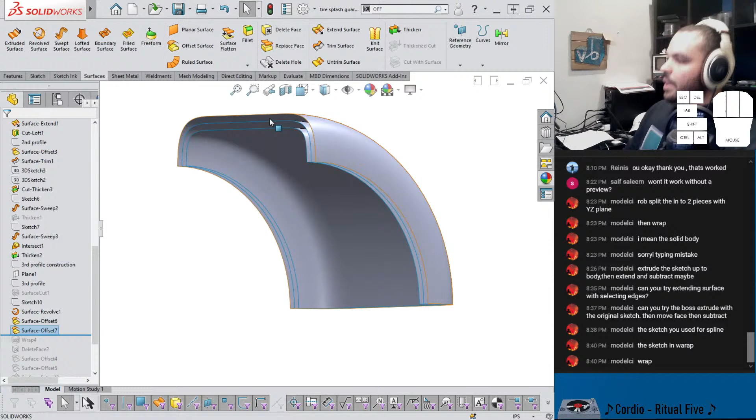And what happens if I just apply the wrap to each of them? So there's our third profile. Wrap this on that. So that's one. Wrap this on that. That could be interesting. And then delete face. I wonder if I could do it from both bodies. That'd be pretty sick. We get something like this, right? Try this. This to that. So that's a lot friendlier.

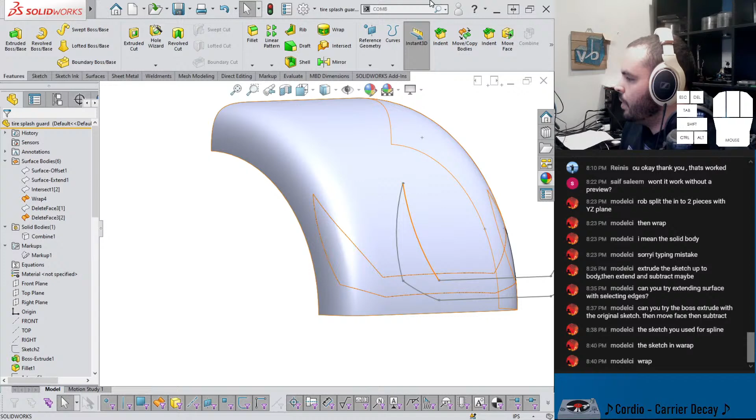Huh. And then what we could even do now is go to your combine, subtract. And I suspect there's this, right? You know, let's try to use a sweep method with this. So, can I use the same delete face on this one? That'd be pretty. I hate you. Alright, I'm just gonna, 'cause I don't feel like digging through all of those. There we go. So we want to get rid of this. So now we want to get a 3D sketch. Select open loop, convert. There's our path.

I should have just put that over the combine. I went too far down. And where's my solid body?

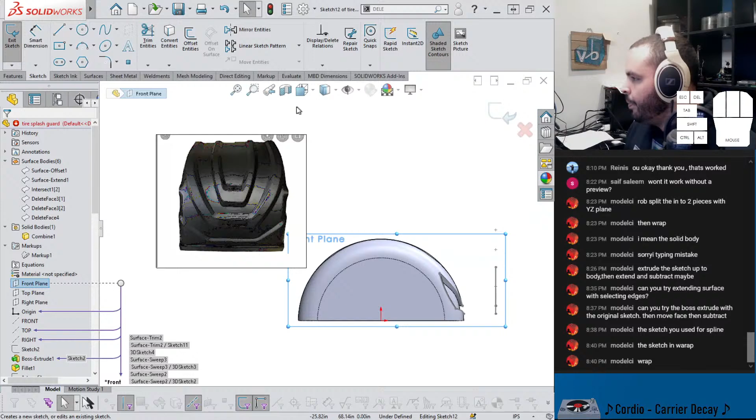Let's try a sketch from the front, going down like this.

Oops, what did I snap that to? That's not correct.

Like that, maybe. I can just get all of this.

Hello? Bro, what is that? Oh god, I hate that so much. Like, oh man.

Let's see, natural. Trying to see some of these options here. I just had a thought.

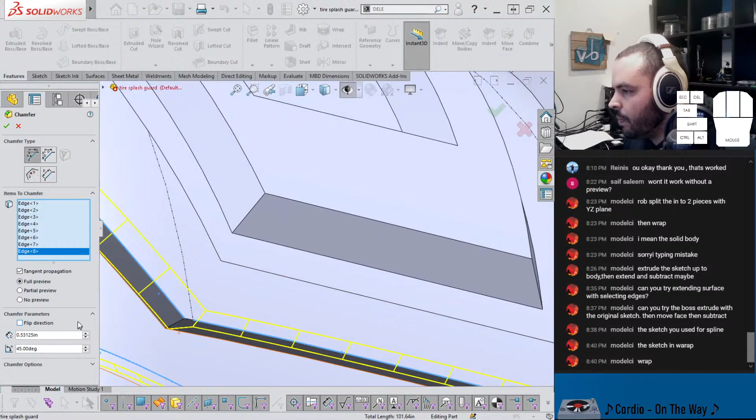Oop, didn't like that. Oh, there's a tiny issue. Oh, that's really annoying.

I'll definitely goof things up. I might have to flip that. Interesting.

I wonder if I can clean this up with delete face. Whoa, that looks wild.

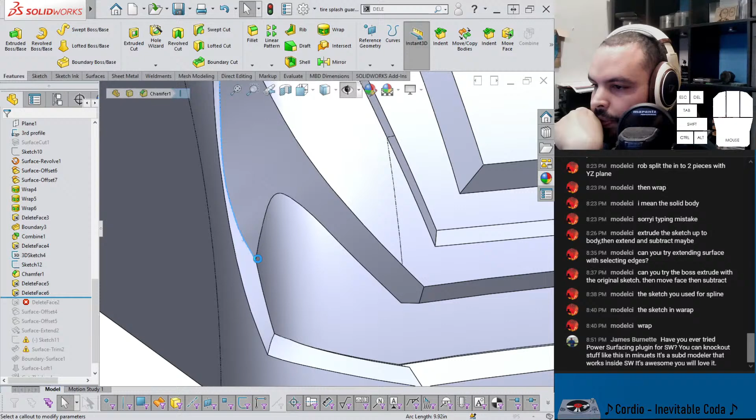So I wonder if we can smooth this surface out. Yeah, because Solidworks doesn't have sub-D stuff. That's what you know, X-Shape and X-Design are like, trying to fill in here.

I've made it upset, so we'll hang out for a minute, just let it think about what it's done. Yeah, we know we ain't gonna do that. Yeah, I realize I might have dug myself into a bit of a hole.

Let me save. That was a little scary. I wonder if I can clean these up at least.

That doesn't look so bad. You know what I might even do? I'd say delete face, delete these two, delete and fill, like that. What does that give me?

Bumpy. Yuck. Well, what I could try and do...

Let's just go for delete. I'll see if there's like a surface patch, because I know this stream is getting a little bit on the long side, and even though it's not perfect, I do have to end somewhere.

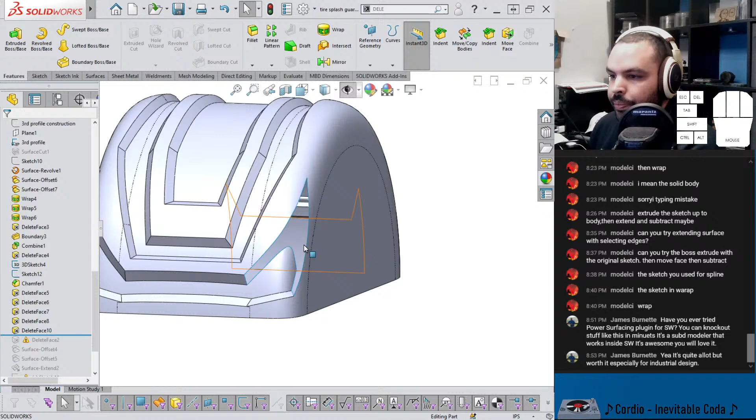That's both the bane and the beauty of CAD modeling today. It's like you just gotta get it in, you just gotta turn in the assignment, you know.

But I do want to try filled surface at least. Yeah, let's try select open loop.

So we do have this. So this to these. What if I set these to tangent?

That does help it just a little bit.

Oh god. That was not the preview, dude. Not funny.

Yeah, this definitely... I'm just gonna try for a few more minutes, try different kinds of patches. You know, I'll do that.

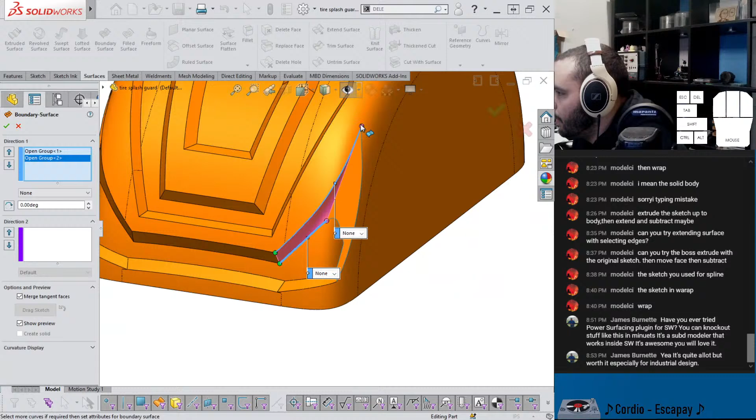Flip connectors. Let's bring this back like here. That's one.

And maybe from here to here. Flip connectors. And let's try filled.

And fix up boundary. Oh, that looks way better. I know I'm changing the design on this, but yeah, well, it's not the worst thing ever.

Oh yeah, no, of course. This thing is gaping. You need to knit it.

But I'm trying to think of whether I should knit it into a solid, because I need to get it on the other side. Yeah, let me do that.

Knit. And I definitely want to turn this into a solid. But apparently there are some gaps that are irreparable.

Oh, that's annoying. Yeah, let's knit these three together. I wonder if I can get intersect with this, select internal regions.

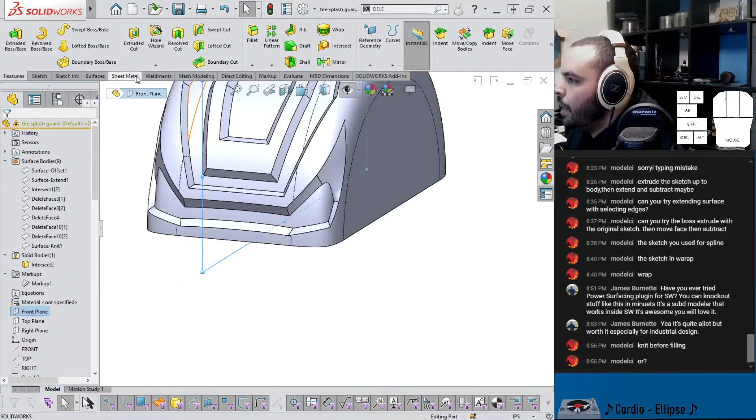Yeah, because it looks like there was a little sliver of face left in there, but intersect took care of that. I can say surfaces cut with surface, that whole plane.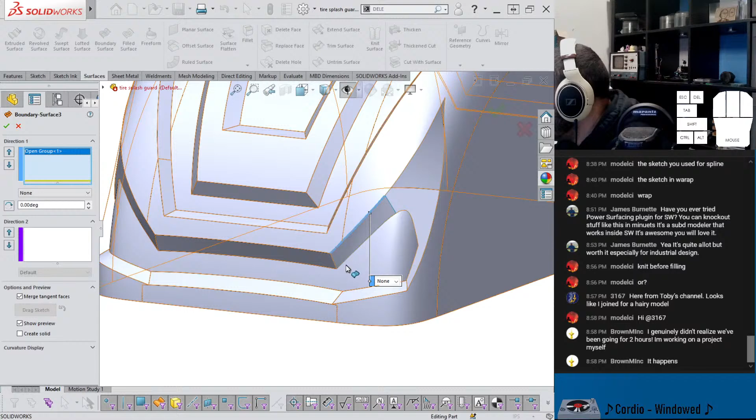Yeah, it happens. Yeah, I probably shouldn't have been so cavalier about that. Boundary surface is there. Oh, actually, so what is this one? Oh, it looks like I replaced the wrong edges. I'm such a doofus. Clear.

So here to here. Flip. Yeah, it looks like it just lost a bunch of relations. There we go. Before boundary, you could use the heal edges command. Yeah, that is a thing you can do.

Okay, so we have that. Intersect fails. Yeah, now we don't get internal regions, so that stinks.

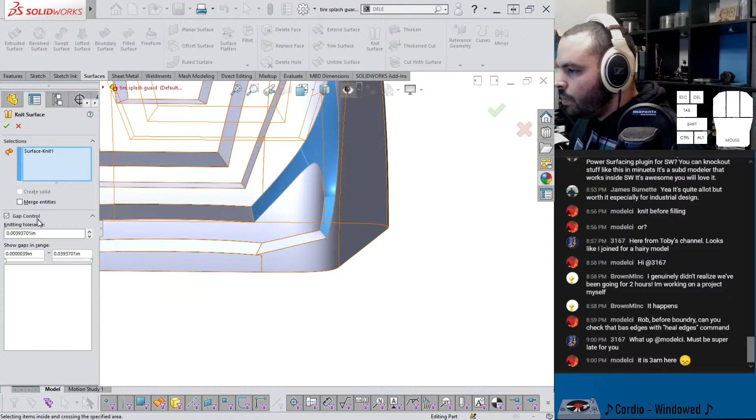What if I do try and knit these? Now we get... yeah, it's not going until I get this into a... just create both, see if that helps anything. Oh, interesting.

Okay, that should go. That should go. Boy, howdy. And we're getting a bunch of garbage surface bodies. Let's save, and I'm just gonna redo. I should have known better than to reuse a sus feature from before in the tree.

What now? Mirror. This. It looks pretty cool. Yeah, so I think let's bring this home.

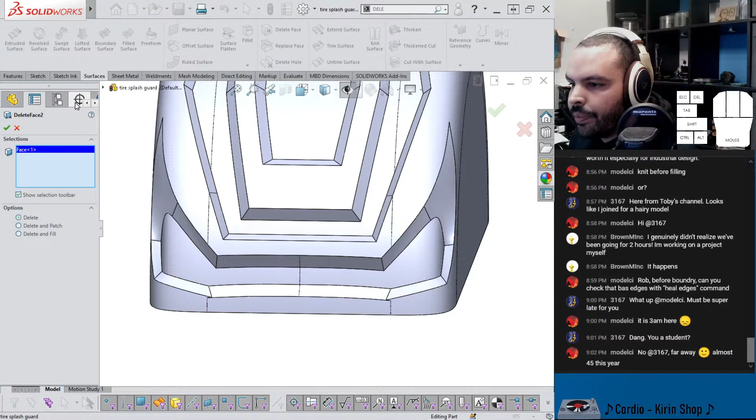So where's this delete face going to? So what is this face? I can't recall. Well, for luck. Yeah, let's do some cleanup. So I need to get rid of these.

Yeah, it's not perfect, it still has some issues, but what I'll do - let's get the front plane like that, and then say extrude cut through all. That, and then we can shell, which might be a little bit interesting to see. Also, that does go through, which is pretty cool.

I guess I did forget to put some fillets, so here, let me save. Let me go back, let's just get some fillets here. Symmetric, circular, 1.5. Okay, those added.

Oops. Put those. Those added. Okay. To get these on the other side too. Yeah, I don't think... oops, I misclicked.

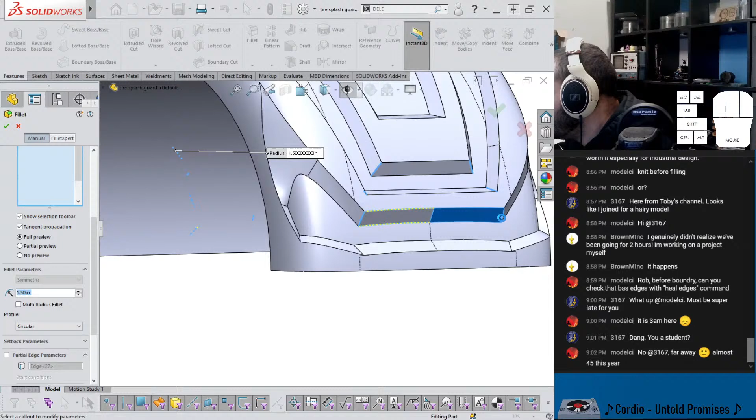Okay, how does this fare with that? Definitely more surfaces to offset.

Yeah, I'm glad you're hanging out with me all the way here. All the way until 3 a.m. modelci.

And that does complete. I'm gonna add a bunch of smaller fillets, and I think that'll make the shell take a long time to rebuild, but we'll see. Let's go fillet, we're gonna have this. This is gonna be a smaller fillet. Like that, like this.

Like this. Does it fail? Let's see. It does, too much. Let's just get that and let tangent propagation work. Just leave it like that.

Let's try face fillet. That seems to be working better. If I add this... oh. Nope.

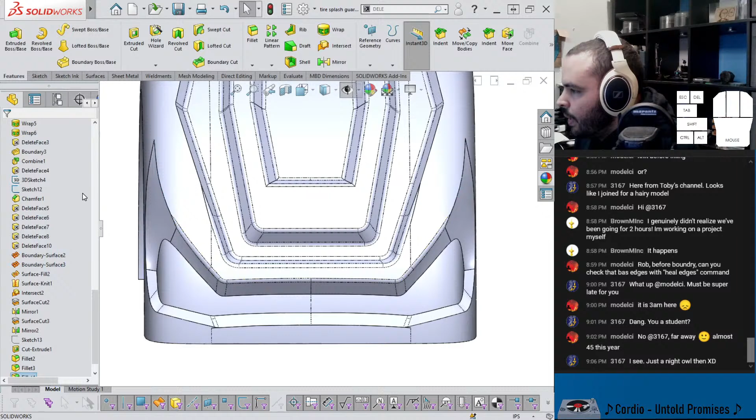Yeah, that is going to be a pain, but I might be able to take care of that with face fillet. Doesn't like it. Yeah, I might just have to leave that there. Yeah, these fillets aren't very great.

Whoops. Let's try this. Doesn't like that either. Man, I might have to come back to this on a different day, honestly. Yeah, I just don't like this geometry overall. Let's see.

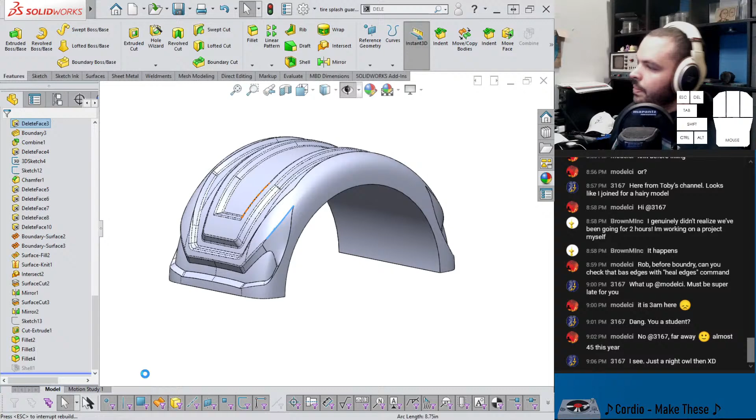A cool trick you can do - I'm gonna get a plane. If I click the edge and its endpoint, you can get a plane there. Sketch on that plane, and we'll just do like a square, pierce, equal 1.

Oops, wrong thing. Sketch, I'd like it to be the active one, please. This. Swept. Selection.

Why is it having trouble with that? That's kind of unexpected. Let me try. Yeah, this from all the way back there, sketch 10. Looks like Solidworks has gotten a lot better.

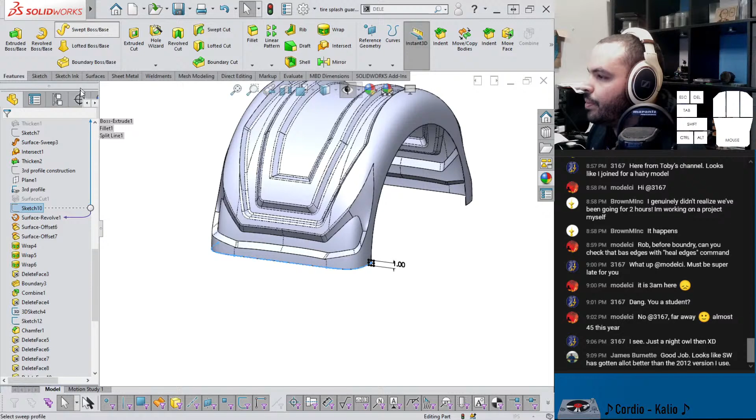Okay, so it looks like it's picked that up. Alright, there we go. And let's uncheck merge, because I can just mirror that body instead of having to wait for it to rebuild on the other side. There.

Bodies, there we go. It's gonna combine. Yeah, I know it's not the best thing ever, but it's CAD model of the day, not CAD model of the project.

So I think I'm just gonna slap a texture on this. Interesting, I lost the ability for RealView.

Let me see something. Let me make this darker. Maybe not that dark, just a little bit darker than that. There we go.

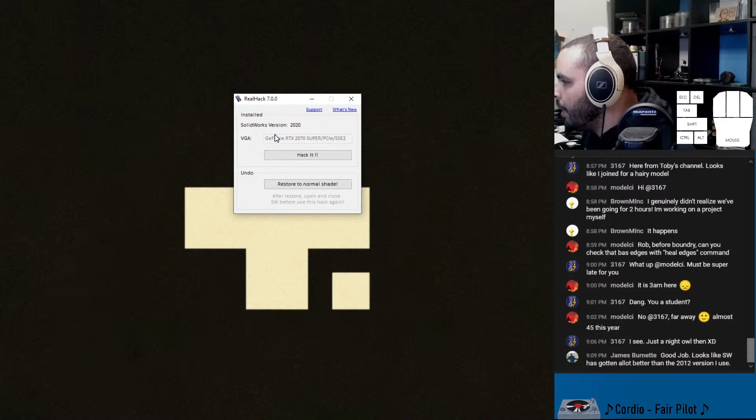Save, and let me see if I have something here. Real hack, because the thing is, I'm not even supposed to have what's it called, RealView. So if I exit out of this, and then, you know, I have RealHack. So yeah, that's my graphics card, GeForce RTX 2070 Super. Yeah, it's fine, use it at your own risk. RealView activated. No, I don't want to do that. Screw you.

Alright, let's bring back SolidWorks and see if it'll boot up. And RealView is activated. So I can put a link to that, or I can provide the RAR, although it's like an at-your-own-risk thing. If you have a gaming graphics card, you can use RealHack to activate RealView, even if you don't have a proper card.

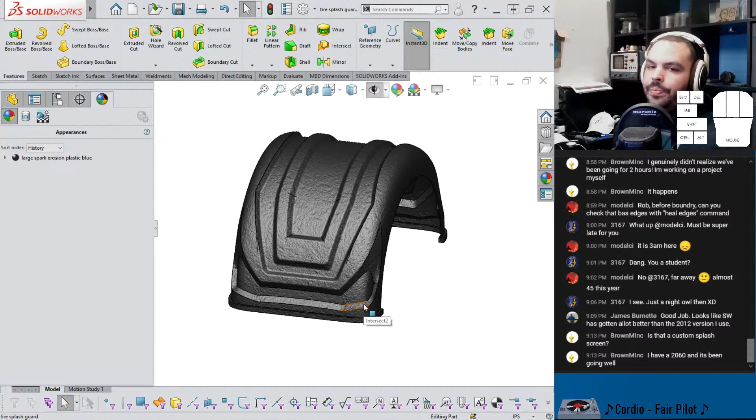I have a 2060 and it's been going well. I'd say it's a little bit more stable if you have a workstation card, but it's not worth paying $2,000 more for a card to be more stable. I just don't see the value there. The only time I see the value is if you're a company that has SolidWorks on subscription and you want the full suite of tech support services, it's best to have a workstation graphics card, because SolidWorks Corp does test those in-house.

So they can better give you support if something weird's going on. But at this point, I can say save as PNG, options. Let's do it at 300, so it'll make a pretty large image. Print capture. Might be off to the side here. Yeah, I can edit it.

So, I think that's going to be the model for today. We had some successes, we had some less. But you guys were here with me every step of the way. I think I'm going to call it here.